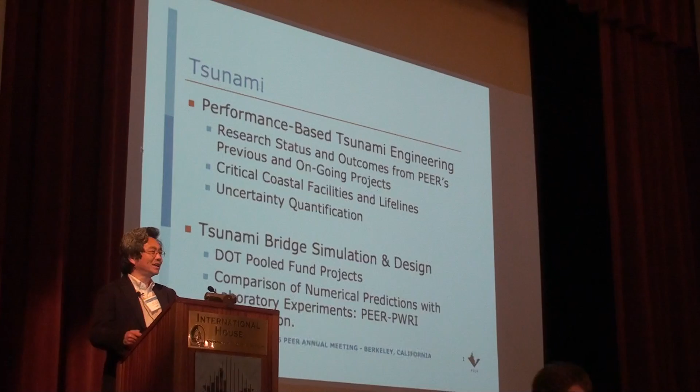Stand here. Okay. Where are you gonna sit? This afternoon consists of two major portions.

One of the topics is performance-based tsunami engineering, and the other is tsunami bridge simulation design. Those are the two major components.

About performance-based tsunami engineering, this is what we've been working on for the last couple of years, supported by PEER. Hopefully it's going to be an ongoing project. The emphasis is that we recognize we're trying to develop this methodology for critical coastal facilities and lifelines, and we are also heading toward developing a methodology for uncertainty quantification.

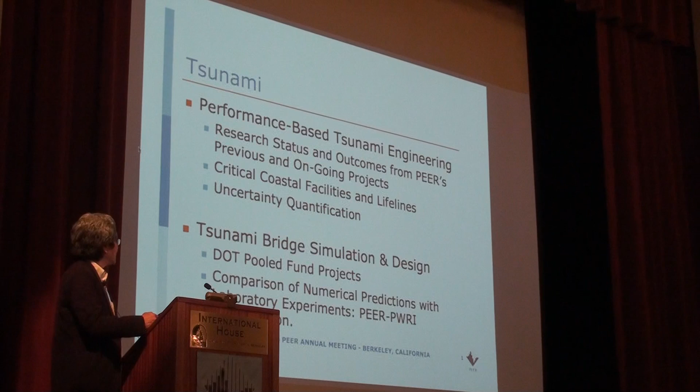For tsunami bridge simulation design, we have a DOT pooled fund project, and we are trying to develop numerical models and systematically compare them with laboratory experiments.

Let me talk about the PEER tsunami program. It started probably before this, but eventually it started actively right after the March 11, 2011 Tohoku tsunami. We had several meetings trying to find what is the optimum role for PEER in this.

What research can PEER contribute that would be most impactful to the California, Oregon, and Washington coast? That's why we discussed this during several meetings like this, and basically we tried to identify PEER's niche.

After these discussions, we thought it important to recognize that other people are doing tsunami research, like FEMA, which tried to develop hazard models for multiple hazards. They did not implement tsunami yet, but we did study such things.

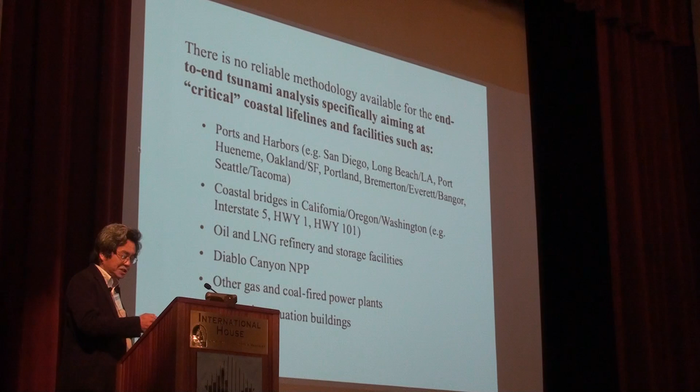Thinking about all these other activities, what PEER can do is pursue an end-to-end tsunami analysis, specifically aimed at critical coastal lifelines and facilities, so that we can extend performance-based earthquake engineering, which was developed by PEER. Those are examples of critical coastal facilities and lifelines—that's what we're looking for.

This is the performance-based earthquake engineering triple integral shown here—this is the fourth time, so I don't feel bad about it. Basically this is a systematic consideration; we're integrating the entire phenomena to make a physics-based assessment of the risk and damage.

But the tsunami case is a little bit different from earthquake engineering—actually, sometimes a lot different. For tsunami, you have generation from the earthquake, which creates deformation of the sea bottom, and this is very much uncertain. We really need to know the displacement of the sea bottom, rather than just the shaking intensity, so it's a very difficult thing to do.

The distribution of the displacement is also important, and then it creates a propagation. That part is pretty much handled. But once the wave reaches the continental shelf, we have some problems—it's very difficult to predict the run-up, shoaling, and reflections, and then creating an inundation.

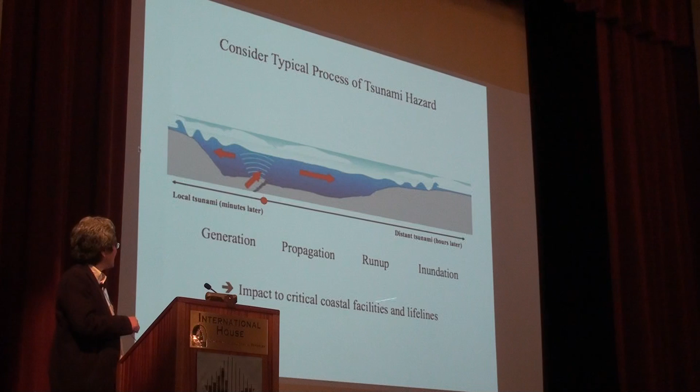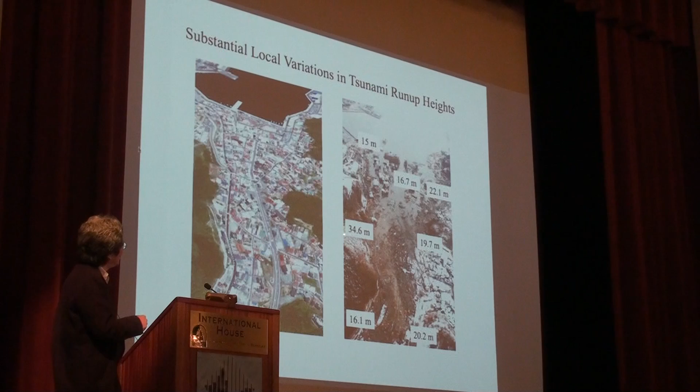If I take a look at the measured tsunami run-up height, one location got a very large number, and another got 15 meters—100% different. So clearly, for this, tsunami methodology has to be done with probably GIS-based approaches, because location is very important. Perhaps we should do a simulation-based, or scenario-based, analysis for this, if you think about these kinds of variabilities.

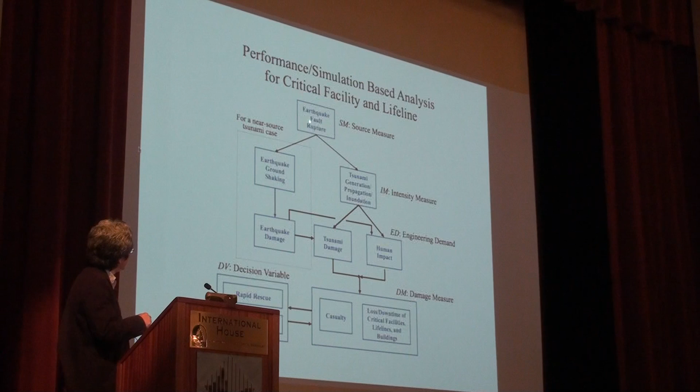So we talk about this—this is the sort of structure for performance-based tsunami engineering: fault rupture, propagation, damage, and assessment. So the tsunami version of performance-based engineering is just like this. We try to make it an integral formulation—rather than a triple integral, it could be a double integral, or it could be a triple or quadruple integral. But I think you understand the concept of these performance-based methodologies.

What we're going to talk about in part A is developing a performance-based tsunami engineering methodology. As a test bed, we use the port of Hueneme for this. So the things we're going to talk about next will be the following.

After me, Dr. Hong Kie Thio is going to talk about probabilistic tsunami estimation, followed by Professor Patrick Lynett, who will talk about simulations, and Dr. Keon is going to talk about the data explorer, and I will talk about evacuations. Okay, so next is number two, and then we're going to go with this.

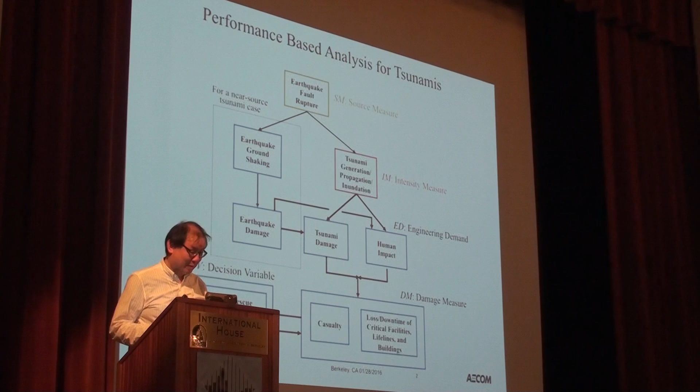So in Harry's scheme, we are looking primarily at these two boxes over here: the earthquake fault ruptures, and then the tsunami generation, propagation, and inundation.

With our background in seismology, the methodology we developed is very analogous to seismic hazard analysis, probabilistic seismic hazard analysis. I'm showing that here in these boxes: on the left, seismic hazard analysis, on the right, tsunami hazard. It's really the same concept.

We start off with the source models: magnitude, location, and recurrence. In the case of tsunamis, we also look at slip distribution. That's very important.

In seismic hazard analysis, we normally use GMPEs to characterize the ground motions based on magnitude, distance, and other parameters. More recently, people have started using systems like CyberShake to actually run simulations, and that's similar to what we are doing. We're using tsunami simulations instead of GMPEs, because it's more accurate and more practical.

In seismic hazard analysis, we then integrate to a site hazard using linear methods. We do the same for tsunami hazard analysis, where we integrate an offshore tsunami hazard, because in that regime everything is nice and linear, so we can efficiently integrate over a large number of scenarios.

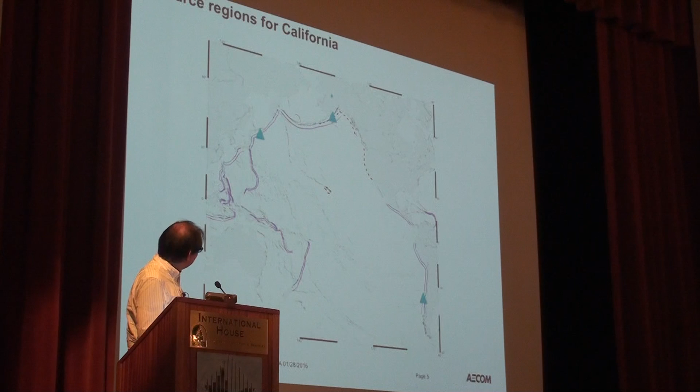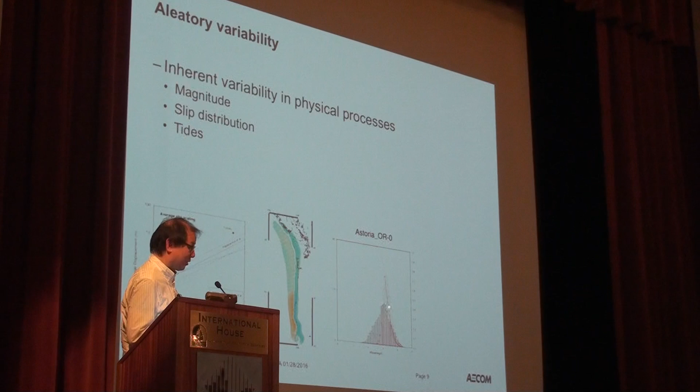And then finally, we also have to include modeling uncertainty. This is kind of similar to the sigma in GMPEs. And of course, since we don't use GMPEs, we don't actually have a sigma that is inherent to the process.

So we actually have to come up with our own version. PEER has actually funded us, for instance, to develop some equivalent sigmas for these probabilistic tsunami hazard analyses.

An example of them is shown here, where we're looking at a very well constrained earthquake. Of course, this is Tohoku. This is probably the best constrained earthquake that we have.

We look at the modeled results and the observations, and basically construct sort of artificial distribution functions and an artificial sigma for this analysis.

We do this for different circumstances, for different grid sizes, and also we differentiate between a local sigma and distant sigma, because the sigmas for the local environment in the near field are probably going to be quite different than for the far field.

Okay, so now looking at a couple of results and applications. This method, I think up to 2012, was funded by Caltrans through PEER, and since then the CGS has taken over the funding to actually produce maps for the state of California.

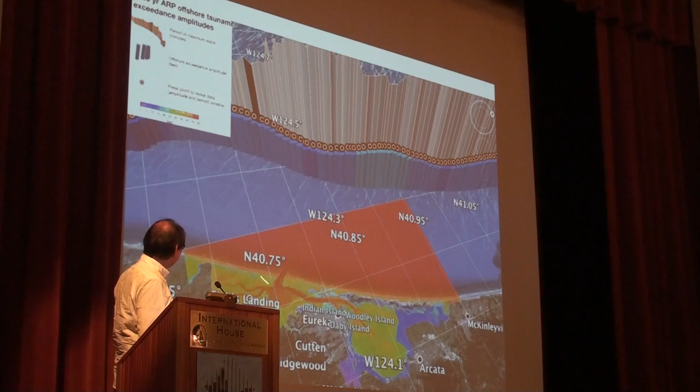This is my last slide. I just wanted to show that the work that we developed here at PEER has actually found its way already into other applications around the world.

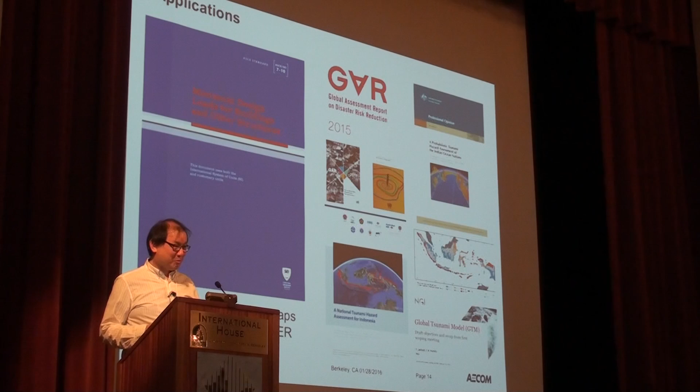So of course we have ASCE 7. It's also now used in the most recent issue of the Global Assessment Report, the tsunami part, uses the same methodology, actually the same software that we developed. Same thing for the tsunami hazard map for Indonesia, the Indian Ocean tsunami hazard map, and we've also started more recently a global tsunami model, which is hopefully going to be similar along the lines as the GEM, except that we don't have money. But it's in its early stages, and again, that will be using probabilistic tsunami hazard as a methodology. Thank you very much.

So what I'm going to talk about today is more on the modeling side, trying to understand modeled variability with a focus on currents.

One of the themes I'll touch on is that while modeling the elevations of the tsunami is relatively easy, and we have a lot of confidence in that, modeling the speeds falls on the other side of the spectrum. There's a lot of variability, both modeled and natural. It's a good research problem because we expect there to be physical variability. And when we talk about design of structures, we're most interested in the velocities. We talk about drag loads as proportional to the velocity squared. So we need reliable estimates of the velocity, or at least we need to know how unreliable they are. These are the types of things I'm going to talk about today.

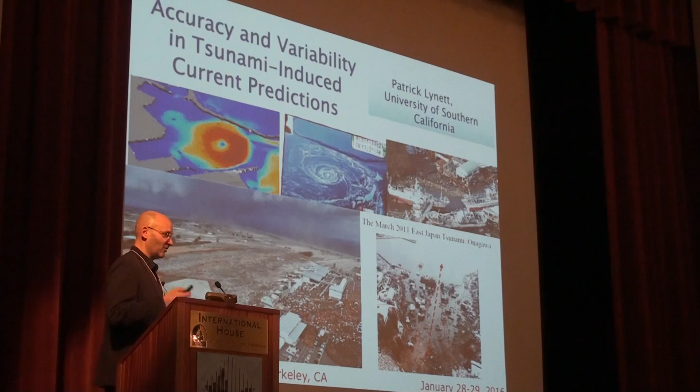Eddies are what cause us variability in the near shore. They are turbulent structures — fundamentally chaotic and nonlinear. We shouldn't be able to predict them in a deterministic sense, but yet they drive our currents in many situations. They're responsible for transport of large and small objects, and also for forces. We'll also spend some time at the end talking about overland flow, where you have to deal with interactions of structures, buildings, irregular topography, and things in the flow, and how we can get a handle on that in terms of variability.

So where we fall in this talk is in this box, the intensity measure. We're also doing work now on tsunami damage, trying to connect these speed predictions to damage, but I'm not going to talk too much about that here.

As an outline, we're going to examine model accuracy and inter-model variability. We've done a number of multi-model studies so we can get a handle on how these things vary. We'll focus on two main pieces: coastal flows, meaning areas where there's already water, and overland flows, which are areas that are dry. We'll discriminate between areas with eddies and without eddies, and talk about how spatial averaging and model ensembles may be a solution to the chaotic nature of the velocity. We'll talk about accuracy in flow depth versus speed, and look at some statistical measures of inter-model convergence to get an idea of how we can put confidence limits on some of this variability.

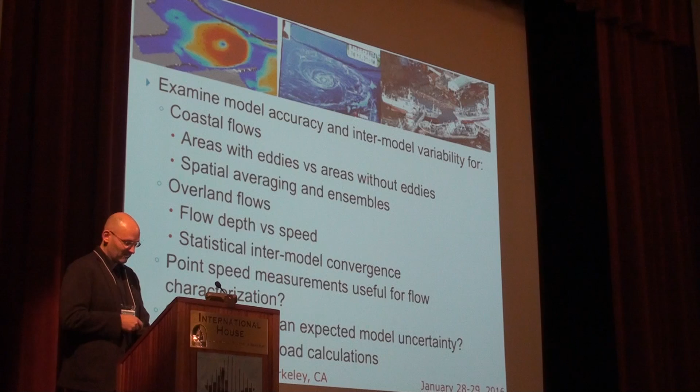I'll conclude by trying to resolve, or at least give you some thoughts on, two questions: are point speed measurements useful for flow characterization in light of the variability I'm going to talk about, and can we provide an expected model uncertainty if we use a single model in a deterministic type scenario? Obviously, there are implications for load calculations.

So I'm going to start with a community workshop we put together, where we brought in a bunch of different modelers from all the different states in the U.S., plus international participants, and gave them 5 different problems to run. I'm only going to talk about one here, which is Hilo Harbor — the Hilo Harbor breakwater on the Big Island in Hawaii. This is a uniquely instrumented harbor: you have a tide gauge and two ADCPs. An ADCP is a bottom-mounted instrument that uses acoustic signals looking up to measure the currents. So we have current measurements at these two locations along with the tide gauge, giving us a fairly well-constrained field case that includes velocities.

I'm not going to talk too much about how well the models did in terms of accuracy, just because I don't have time. There are challenges with these point measurements, but these devices in NOAA networks don't sample that frequently. They're not made to sample tsunamis, they're made to sample tidal currents, so they often only sample at 6-minute intervals. In a tsunami, the current varies over the course of minutes, so you have a lot of problems with undersampling on these instruments.

So I'm going to talk about inter-model variability instead. What you see here in this elevation view, as it's running, is the water surface elevation. The reds are high, the blues are low. The point to notice is that on the scale of the harbor, there's not a whole lot of variability in the water surface elevation. The area kind of sloshes around like a bathtub, but it all changes together.

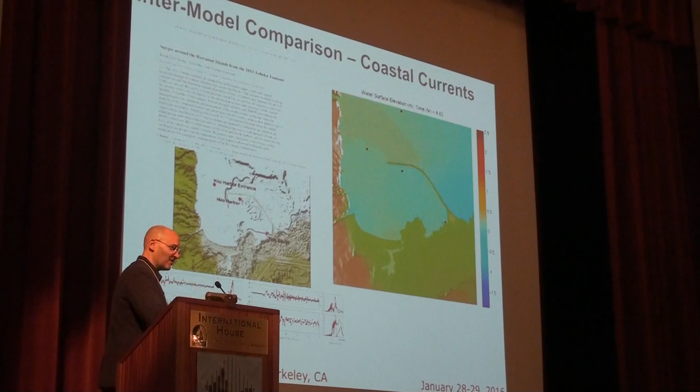That is going to be very different from the current prediction. Now this is showing you the speed, where the deepest reds are the strongest currents. What you find here is a lot more spatial variability - things change much more quickly over small periods. You also see these donut type things - these are our eddies, these coherent turbulent structures that get shed off. They have a mind of their own, they float around, but they contain very strong velocities.

So they're essentially carrying the hazard with them as they go, and their paths are strongly random. Small perturbations to the bathymetry, to the flow, make them have different paths. They're fundamentally stochastic, they're random processes.

What you see here is that as the flow turns around with the breakwater, you have strong currents as it gets pushed through - a lot of water getting pushed through. There's a relatively shallow area here, so you see the strongest velocities. Also, make a note of our two ADCPs right here, here, and here.

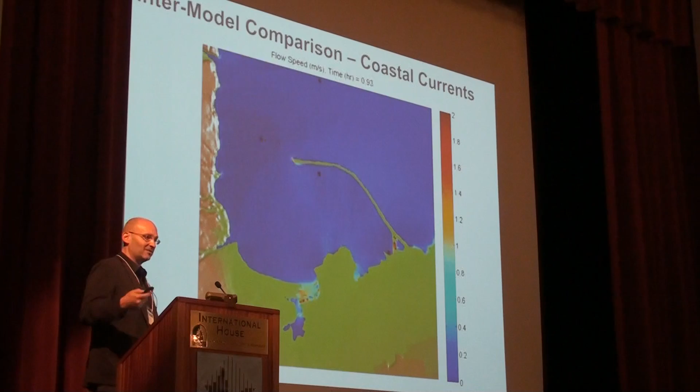The thing I want to reiterate here is that you're using a point measurement either to calibrate a model or even in real time to figure out the hazard that exists during a tsunami. If an eddy passes through one of these, you get a very different signal. So what is the chance that an eddy passes through here? It's one of these issues that we have with point measurements.

In fact, when we went through this benchmark workshop, we found some really interesting things on the modeling side when we talk about point measurement. Interesting things like the 20-meter resolution and the 5-meter resolution results gave the same numbers, but the 10-meter resolution gave very different numbers. It's really, really hard to reconcile model convergence where your high and low resolutions agree, but the one in the middle is bad.

So the reason for some of these is shown here. You have a snapshot of what we call vertical vorticity - how much the water is spinning around the vertical axis. It's the whirlpool, right? If you look at the flow, you see the water spinning around. These colors give you an idea of how quickly they're spinning. In a 10-meter resolution and a 5-meter resolution at the exact same time, you just happen to have an eddy at the measurement point in the 10, and you don't have an eddy in the 5. So you wind up with very different peak velocities, very different signals because of this random feature.

All right, so now let's get to the inter-model. Again, we had 14 models, a lot of models. Everyone contributed to this. There were models with sophisticated numerical schemes, simple numerical schemes. There were models with simple equations to solve, models with three-dimensional equations to solve, so we had a nice wide range. You can take all of these models - they're all running with the same bathymetry, the same friction coefficient, the same controlled boundary conditions. So the variability that you get is driven by the modeling itself.

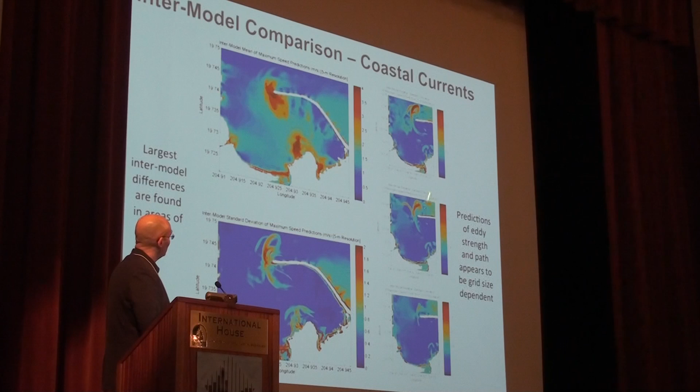How do we reconcile it? The other thing you notice is that these are model standard deviations as a function of resolution, from the coarsest to the finest. So the strengths of these eddies are going to be dependent on the model resolution. It's another tricky thing to deal with.

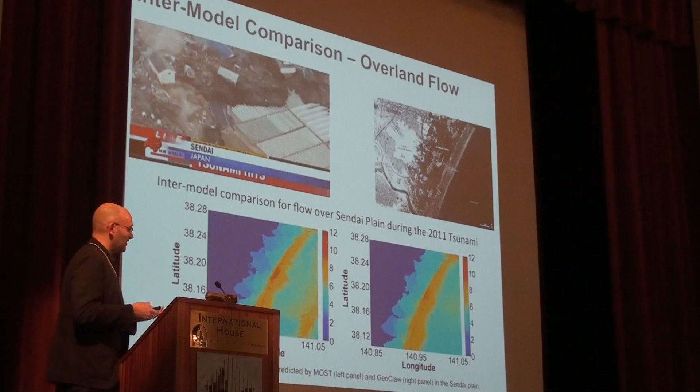Let's talk about overland flow here. We're going to focus on Sendai. Sendai is unique—it's a long, flat plain with very strong flows. You had inland inundation on the order of 5 kilometers, so the flow went really far inland. You're talking about flooding numerical models across many, many grid cells, which should be a tough thing for an intermodel comparison to pick up.

But what you find here with the two models we tested is that they do very well. They agree quite well on where they pick up the inundation limit, as you can see here. The two lines are the two different models we tested, showing how far inland the water went, and the dots are the measured run-up points. So these two models, in terms of catching this 5-kilometer inland run-up, do a good job. This is promising—we have two models with controlled bathymetry and boundary conditions, but they're reproducing the flow elevations quite well.

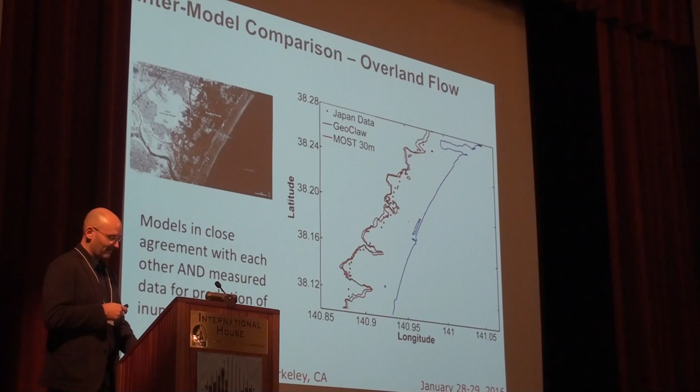But let's now talk about velocity. We look at the same plots showing maximum velocities from the two different models, and we start to see a different picture. I'm not going to show statistics here, but if you look at variability locally at a point, you start to see 5 to 80% variability in confidence limits on speed. This is tricky because our structures exist at a point, so you have to handle this variability in terms of model prediction.

The other thing I'll mention is that we have very, very limited data in terms of velocities and overland flow. I can't emphasize that enough—there's very little out there. So I can tell you there's a lot of inter-model variability, but I can't tell you anything about the bias because I don't know if the models are accurate. This is the limited data we have—those triangles are data points, and the squares are model results. They do well sometimes, not so well other times. The error here is within the model variance. That's about as much as we can say.

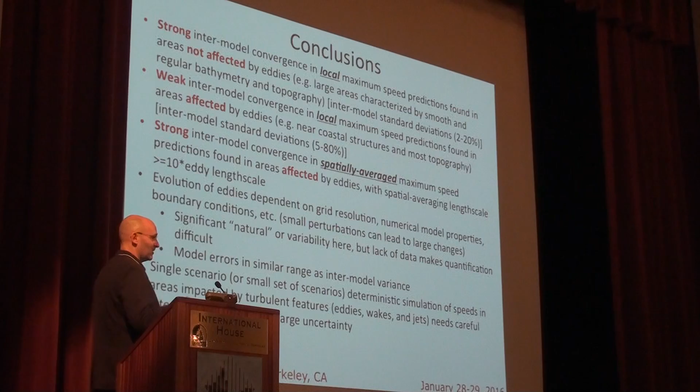I'll skip to the end here. The conclusions, where we are right now: we have strong inter-model convergence on local max speed when you have areas with no eddies. If you're in a simple spot, you're good—talking about model variance between 2 and 20%. No eddies, easy, good, you're set.

As soon as you get into areas where you do have eddies, you now have very weak inter-model convergence on local predictions, talking about 5 to 80% in terms of variance confidence limits, 5 to 95%. You can do things like spatially average, and that gets rid of this because you're averaging over the eddies, but you have to average over a distance about 10 times the eddy length. If you do that, you can start to come up with statistically meaningful and convergent results.

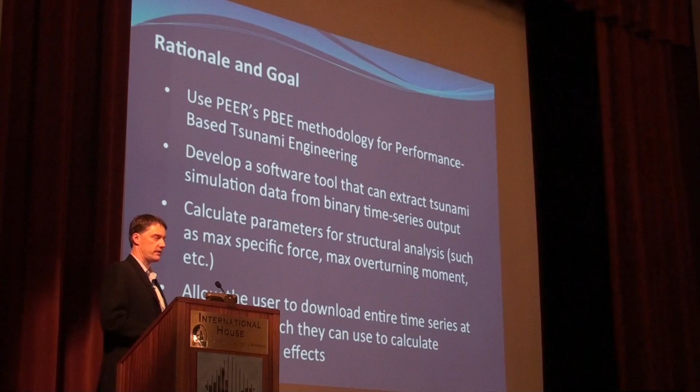So we wanted to develop a tool that would allow the user to quickly extract tsunami simulation data from binary time series output. The tool allows you to calculate the parameters for structural analysis, as I'll show you, and then to download the entire time series at any point, which they can then use to calculate hydrodynamic effects, which is what Harry will demonstrate a little bit later.

But we wanted to take the tool beyond that. That was really a proof of concept. And with funding from PEER, we were able to do that. In the process, we had some considerations of what we wanted in the system.

We were working with pretty large spatial temporal data sets, as many folks are. But processing speed is very important. We wanted to do this in a web-based fashion, so we needed very fast, real-time access to data. And visualization and interactivity was important. The spatial context is not just helpful, it's really essential in this case. And we wanted to give the user a spatial context where they could click and interact with the data, and also do some dynamic graphing and charting and other representations.

So as I said, we wanted to do a web-based interface. Like building web-based tools, everyone has a web browser, and it's very easy to go in and just access the data in that way. You don't need special software. Because the data is spatial temporal in nature, the GIS-based platform made a lot of sense. And the one requirement that we wanted was the ability to integrate additional tsunami simulation output data without much effort.

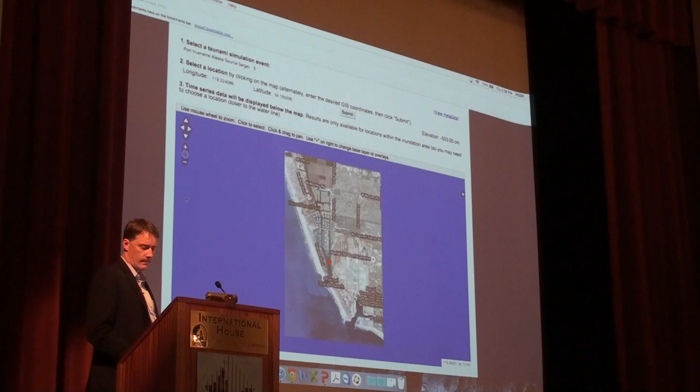So you choose a source event, and you can punch in coordinates directly if you know what they are, or you can just go click on the map. Let me zoom this out to what you see when you first arrive here. The map is constrained to the spatial domain of the simulation that was run. So you can zoom in, find a place of interest on the map, and click a point.

Click any point on the map, and it's a little hard to see on the screen, I think, but this chart, which is inundation depth, is being updated on the fly. What you're essentially seeing on the map here is a representation of a space-time data cube. We have 3,600 time steps in here, so for any point that you click on the map, you're pulling out a time series of 3,600 points. That's what's being charted along here.

And if I collapse this down, it's like these are all expanded, but there are actually six charts down here, and you notice that each one of them displays a max value. So anytime you click on the map, that max value gets updated, and all of the charts get updated. We're showing multiple different parameters here, all being calculated on the fly.

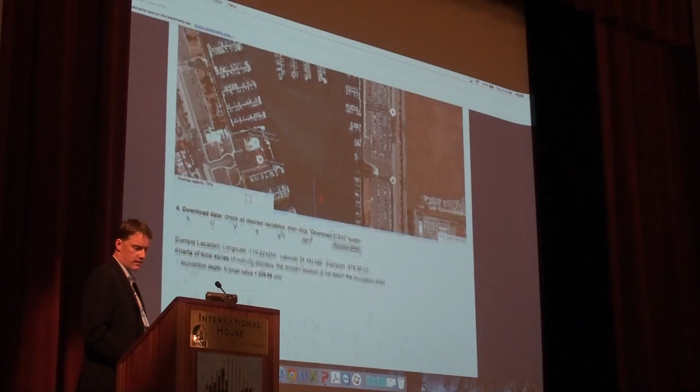The map itself allows you to load in other data layers, any of the Google-based layers, but also we have the bathymetry layer on here as well. And there's a bathy topo layer behind the scenes that's grabbing the elevation for every map click. And we also have the max flood surface elevation, which can be plotted as a grid.

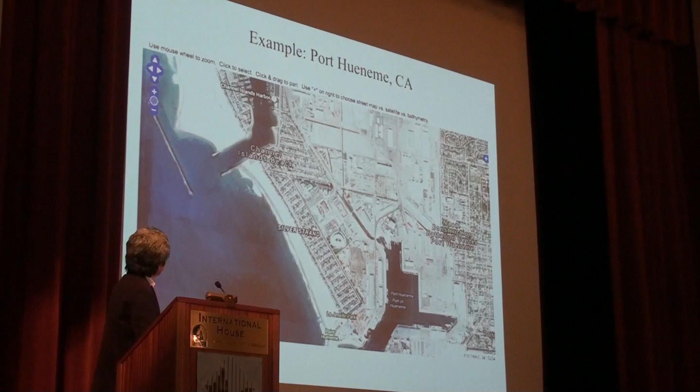Let me show you some kind of application for this tool. How do I do it? What was it trying here?

This is GIS based, and I think this is important to do because tsunami effect is quite a bit different from place to place. But the real eye-opening example was what Pat showed us about the jet formation. So we really need to know where it is.

My example is I just take a look at this simple, rectangular shaped building. And then I pick up the 1, 2, 3, 4, 5, 6, 7, 8, 9 points, each points about 5 meters apart. And then quickly take the data out and calculate the velocity and inundation forces.

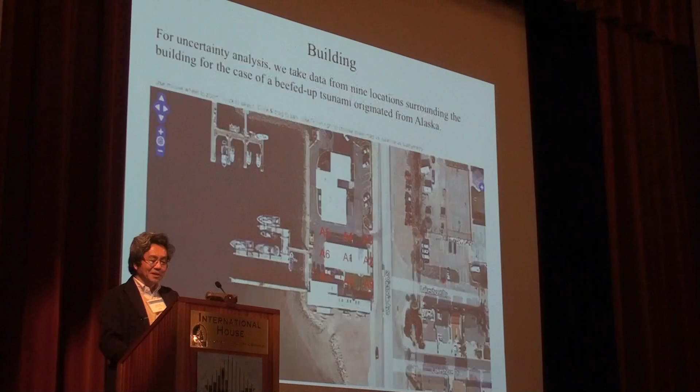So that's the sort of list I can get immediately on that. And then I can also put up, this is the inundation, such a close area, and the variability is remarkable. But at the same time, the good part of this is I can at least - right or wrong is a different story - but at least I can quantify the errors.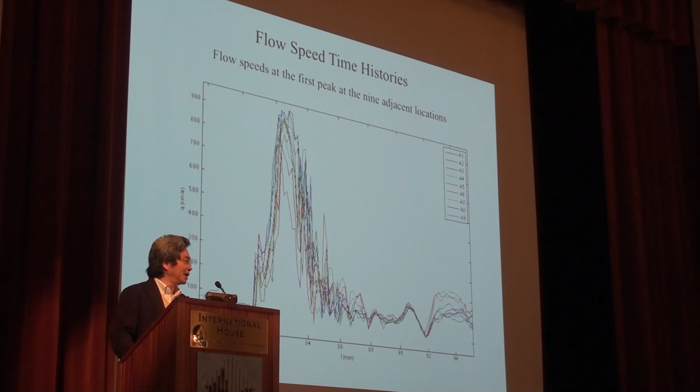Okay, this is for the flow speeds. And then if you know flow speed and the inundation depth in time series, then I can calculate the forces. This is the linear momentum flux forces, assuming this flow to be steady state. And then after this, I can get some error estimate for this, a 90% confidence interval for this. This is just one example.

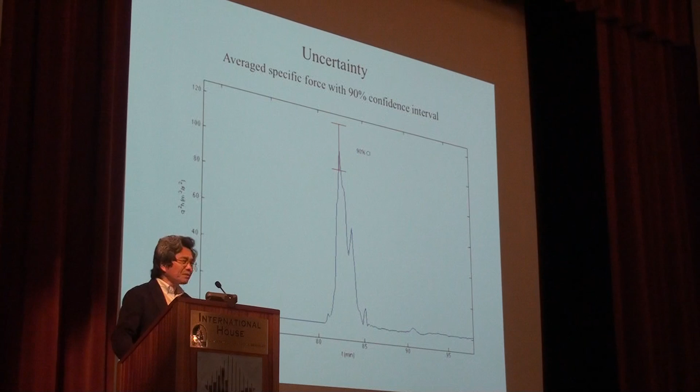And the one reason why we need to do those time series data is the following. When we try to make an analysis for tsunamis for critical facilities and lifelines, we just need to be very careful. Like for the Japan case, some of the concrete buildings toppled. One of the major mechanisms for that is the buoyancy force. The buoyancy force reacts with a time lag. It does not respond with the rising water. So we need to know the time series of the inundation depth.

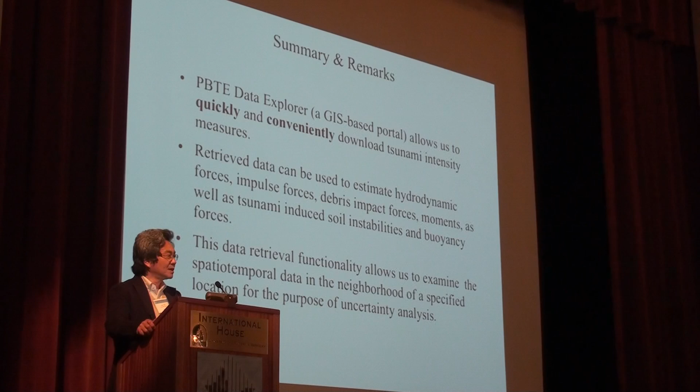And another thing we need to know for the time series data is, of course, trying to find soil liquefaction. Momentary soil liquefaction is caused, I think, by eroding from the soil surface by the inundation up and down. You have to know those time series data because soil response is based upon the diffusion equations.

So if you really try to find those kinds of things for critical structures, we have to have time series data. Okay, so for the summary and remark here, as you see, the response is so quick - there's a huge amount of database in here.

And then you can retrieve the data very quickly and in a very convenient way. This portal is also very user-friendly. So that's the advantage of this.

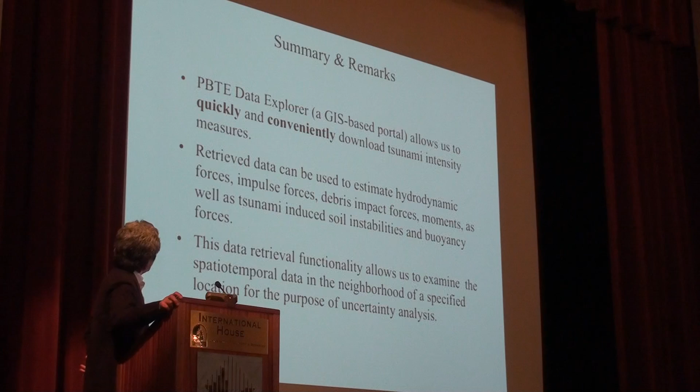Once you get that kind of data, we can get the hydrodynamic force. That allows us to examine spatiotemporal data analysis. That's the thing we can do. And at the same time, we can quantify those uncertainties.

So very fast is one word. Another thing is this really gives you a very nice probabilistic analysis. Right now the data we have for this portal is only 5 or 6 cases. We'd like to expand to 25 or more cases for this tool, and then use this platform to do exercises to find the quantification of the uncertainties.

As you can see, if you have this kind of IT tool, you can combine or attract people from different disciplines working together on this portal. And at the same time, you can actually quantify the model data.

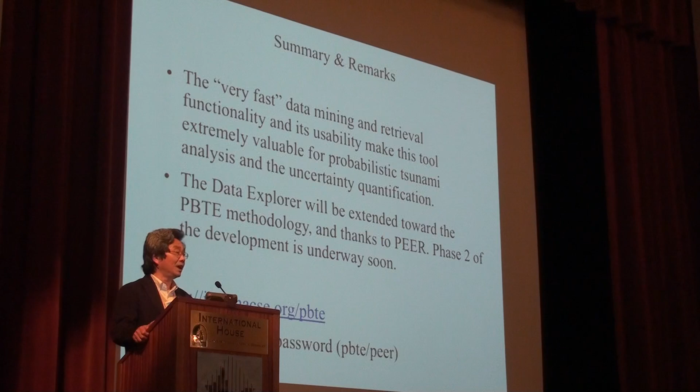Let's see, this is my last slide. All right, this is my last, okay, that's my last slide. And then I can very quickly talk about the casualty, and after that I think I have to give it to the next speaker.

I have been working on tsunami hazard and casualty estimates, because casualty is a very important thing for tsunamis. Tsunami is a very rare event, but you know that the hazard kills people. So this is sort of the effects of this.

This is performance-based tsunami engineering. Whenever you try to make a casualty estimate, people talk about the agent-based model, and that's fine, it's a very nice exercise to do. I tried this agent-based model about 10 years ago. This involves significant uncertainties in human behavior. Human behavior is totally a question mark, very difficult to predict.

So whenever you do the agent-based modeling, you can get the results, but we have to know it creates a significant amount of uncertainties. I'll show you why I'm saying this.

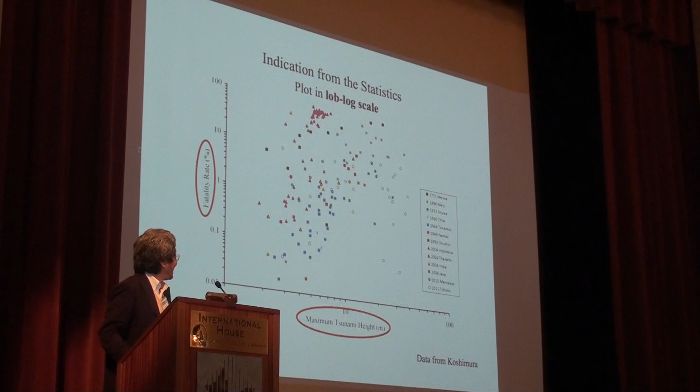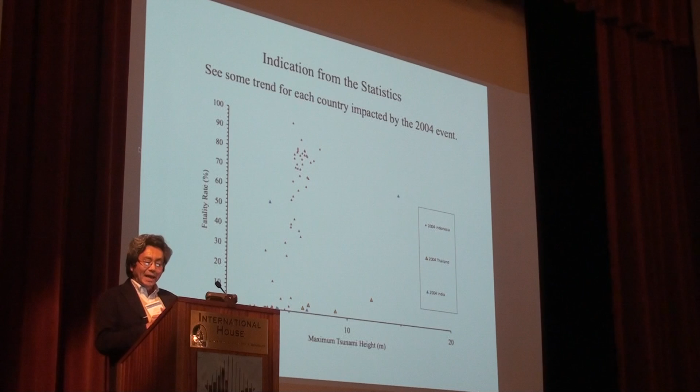This is the statistical data for maximum tsunami height versus fatality rate. This is a log plot, this is a linear plot. I extracted several cases. This is for the 2004 Indonesia case, the 2004 Thailand and 2004 India cases. They show some trend of increase, some correlation.

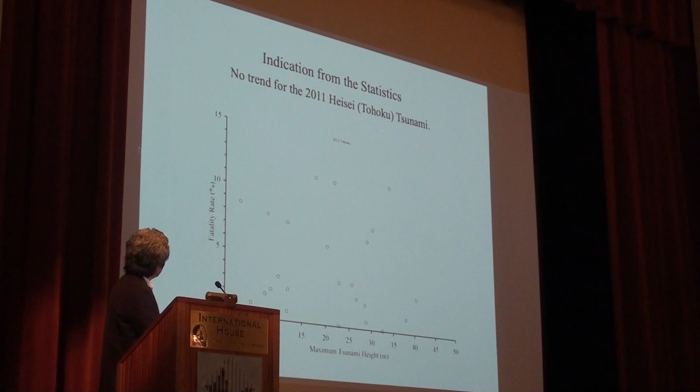And this is for the 1993 Okushiri case and other cases, showing some kind of trend. However, if you take a look at the Japanese case, there's no trend at all. So the only trend we can get from this statistical data is that the tsunami fatality rate diminishes when maximum tsunami height is less than 1.5 meters, nothing else.

Unless you're talking about one given event for a given location. So the conclusion for this analysis is we have a very weak trend for the fatality rate. Fatality rate increases with tsunami height for given events and given localities. So once you have that data, you cannot translate it to predict other locations or other events. More likely, people's prior knowledge is more important, education is more important. So how society reacts is more important than the tsunami's actual physical forces.

So that's the thing. An important factor for tsunami casualty estimation is time. Time-related factors are essential for estimating tsunami casualties. I don't have so much time, so I'll just talk about what's next, and then we can discuss this tomorrow. We have a discussion session tomorrow.

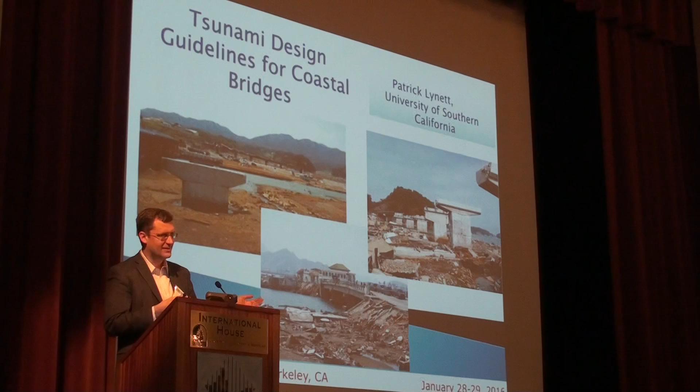Thank you, Harry. So I'm leading part B of this session. Part A was focusing on the source-to-site propagation, kind of what height and velocity of flow at a point, a point being a structure. In part B, what kind of tools and analyses can we do with that information for critical structures such as bridges, which Pat will talk about. Then I'll talk about some other simulation tools we use with bridges, and Mike Motley will talk about advanced modeling of tsunami effects on bridges. This gets back to the end-to-end simulation. We started with the source, now we're getting to the site and what Pat's been doing, some recent and current efforts around bridge analysis for tsunami loading.

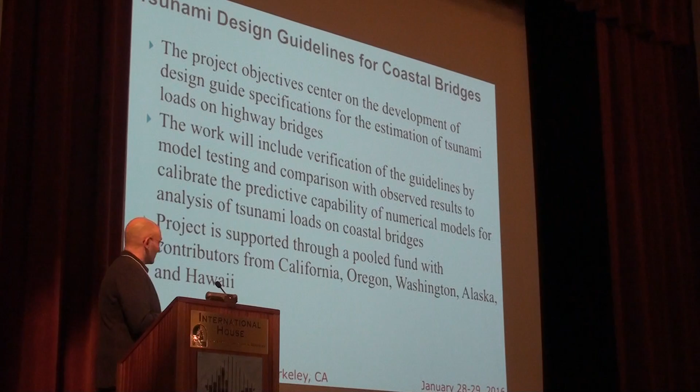So the representation is really specific. We have 5 major working groups. Working groups 1, 2, and 5 are the main ones, but we have 5 major points, and these also kind of lead in time to where the work will go.

So the first working group is tsunami hazard and mapping, coming up with the hazard indices responsible to drive the loading calculation. This group is led by Hong Kie and myself—I'll say mostly Hong Kie, but with a wide group of people.

The idea for this project was to have a few centralized people running each working group to do most of the work, and then bring in larger groups from the community to run workshops and have community discussions, to make sure we had a wider range of inputs so we weren't doing things in a bubble.

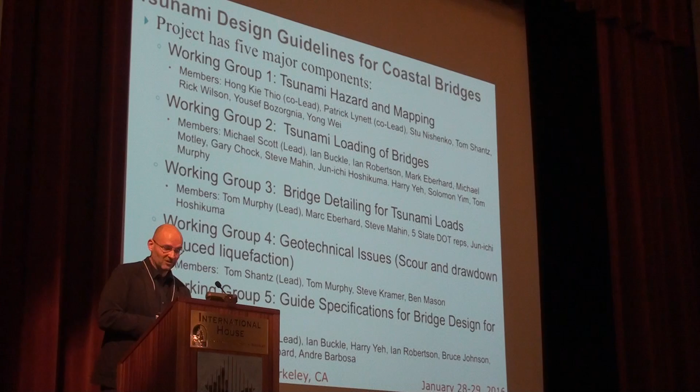The second working group is to come up with the meat of tsunami loading of bridges, led by Michael Scott, again with a range of people to add input. We include groups on bridge detailing and geotechnical issues. Those are relatively minor in terms of the entire scope—minor only because we were judging where to put our resources in terms of funding and what to focus on.

The last working group, working group 5, is led by Tom Murphy, and this is the code—the actual writing, the discussion of the prescriptive method. So here I'm just going to focus on those 3 groups to tell you what we plan on doing, what our deliverables will be, what you can expect to see in the coming years.

So working group 1 has 3 major components. First is the development of a tsunami hazard map database appropriate for the design of bridges. Right now we're looking at what all the states are doing, and they tend to do things differently and not necessarily consistently, so we have to find some way to bring all of these together.

The specification of the hazard level here for bridges is going to be at the 1,000-year level, consistent with other hazards looked at for bridges. It has a disadvantage in that you can't directly use some of the ASCE 7 maps because there are different hazard levels, but you can use similar approaches.

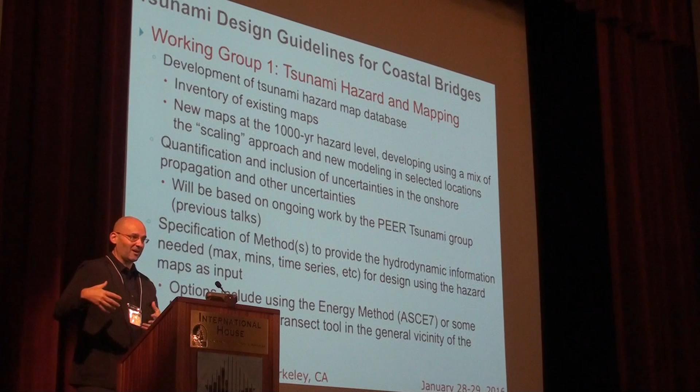We'll include quantification of uncertainties in a way appropriate for bridges, leaning on work discussed in Part A. The last component is specification of site-specific hydrodynamic information. There are lots of ways to do it - you can run numerical models or simpler things. Right now in ASCE 7 there's the energy grade line method, which sits somewhere between a robust numerical model and a prescriptive method. It tries to include some physics in a very approximate way. We'll look at other options too, including transect-based models or other ways to include variability from this modeling tool.

The second working group, again led by Michael Scott, will talk more about this and some work leading into it later. The first major task is the literature review, which is where we are right now, and identifying knowledge gaps - what do we need to fill in to bring all this together and come up with loading approaches and loading calculations for bridges? Workshops are involved here, with lots of discussion. This will lead to a testing phase, where we have knowledge gaps and need to find ways to fill them.

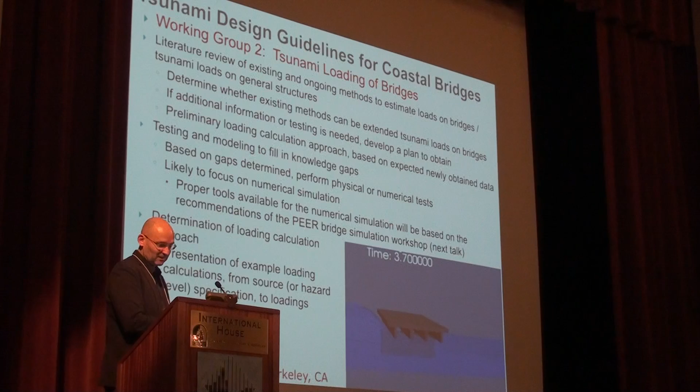This testing phase is likely to focus on numerical simulation only, because the budget allows a lot more numerical simulation than physical model testing. The tools we'll use in this phase will really leverage some of the work that has happened at the bridge simulation workshop.

After all this, the loading calculation approach leads to the last working group, Group 5, again led by Tom Murphy, which has two phases - a draft with lots of discussion, and a final version. This whole project is three years in duration, and the final guide spec is expected to be done sometime in June 2018. So it's forward-looking - we're looking down the road, and we'll get there.

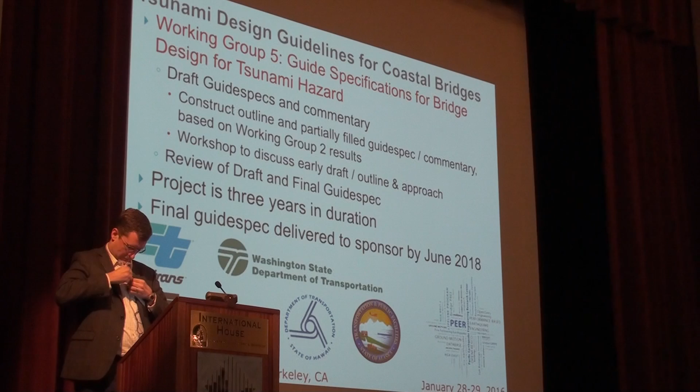Pat discussed a current project that PEER's involved with around bridge forces and determining loads on bridges. I wanted to talk about a recent effort that PEER supported on a workshop held in December of 2014 at Oregon State University around simulation. That'll be the subject of this talk, and then Mike Motley will talk about some more advanced simulation details.

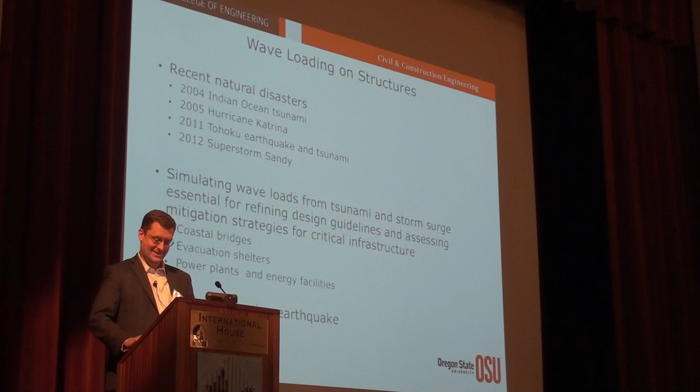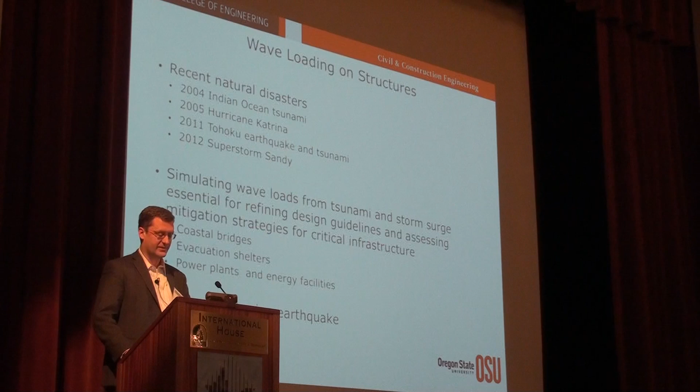As has already been established, wave loading on structures is important. Given recent natural disasters, it's become a very important topic of study, and determining if our critical structures are resistant or can resist such forces observed in these recent disasters. Simulation of bridges, evacuation shelters, power plants, and other critical facilities is essential in order to develop a performance-based tsunami engineering framework, which is one of PEER's thrusts. Also considering the case of tsunamis following earthquakes, simulation will be a big part of that effort.

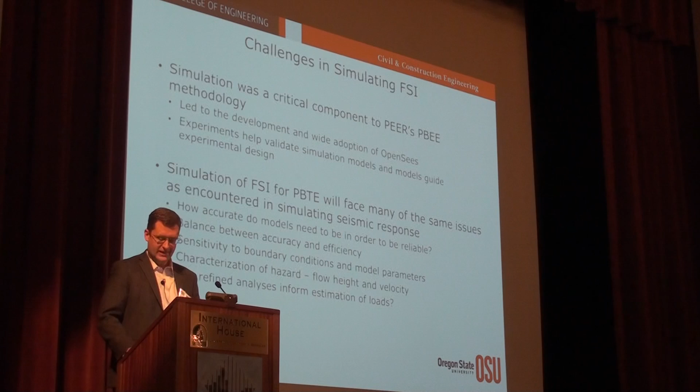Just like with earthquake engineering and modeling the response of structures to seismic forces, a lot of the same questions come up when modeling the response of structures to hydrodynamic or tsunami type loads. How accurate do models need to be? What's the right balance between accuracy and efficiency? Can we get away with 2D models, or do we give up too much accuracy for that efficiency, and have to go for 3D models with other tweaks within them? It's not necessarily the same answers between earthquake and tsunami simulations, but just like with seismic simulations, boundary conditions and model parameters play a big role in the response, as does characterizing the hazard accurately.

Flow height and velocity are really the two things that characterize the hazard in terms of figuring out the loads applied to structures in a tsunami. And of course, can refined analyses inform the estimation of loads in order to determine design specs, like Pat just talked about.

So to this end, back in December 2014, PEER funded or supported a tsunami bridge modeling workshop. There were about 33 participants from the US and Japan, about a quarter from Japan. A lot of the faces you see here are probably in the same room or were at some point throughout today.

We brought everyone together to compare simulation methods and discuss differences in results, identify knowledge gaps, and see where we need to go in order to drive PEER's efforts around performance-based tsunami engineering. So these are the participants.

There's a web page where all the workshop materials are made available, and essentially it was a blind prediction, or quasi-blind prediction contest, of experiments conducted at PWRI in Japan, I believe in 2012 or late 2011, after the Tohoku event.

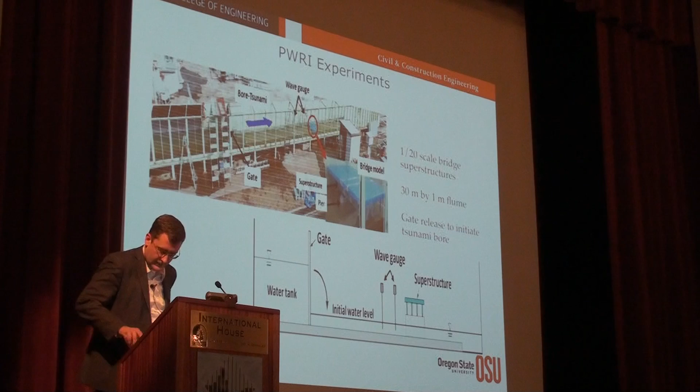What we see here is a 30-meter long wave flume. There's a reservoir of water held back by a gate, and you can see the water level is pretty high here, a standing water level. Down here is a 1-to-20 scale bridge deck model stuck in the flume, some 10 meters down from the gate. The total distance here is 30 meters.

So this gate is released, and then a tsunami bore ensues and impacts the bridge superstructure. This is well instrumented - pressures are taken all over the deck at different points. From those pressures, you can determine forces and look at the superstructure response to the tsunami attack.

So again, the gate's released, and then the tsunami just goes down the flume.

There were a lot of different experiments run by PWRI, but only 4 of them were chosen for the workshop, with 3 different deck types. There was type A, a slab bridge configuration restrained at 2 points, and a 4-girder deck bridge restrained down here where the bent caps would be. Then the same deck type C with a protective bumper on the side of tsunami attack, designed to dissipate the tsunami flow and hopefully reduce the forces. So 3 decks, 4 different cases.

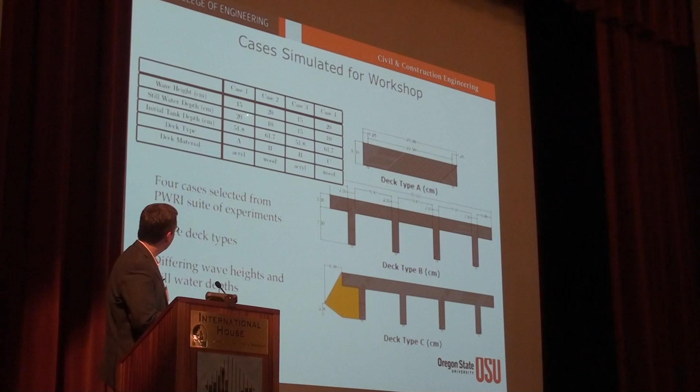It's probably a little hard to see here, but there were differences in the computed wave height based on calculations of what the wave height would be at the point of contact, as well as differences in the still water depth. The water level was varied, as was the level in the tank, and based on relationships between those two and the flow, you could predict what the wave height would be. The wave height and velocity was measured by wave gauges about 1 meter in front of the deck.

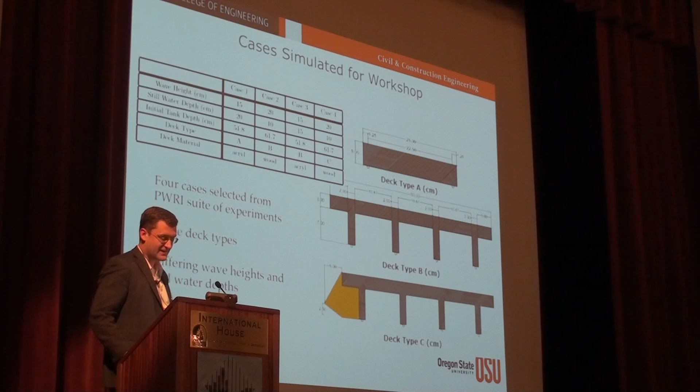So differing wave heights, differing still water depths, 3 deck types, 4 cases. There were about 8 or 9 different software packages used, employing a wide variety of formulations. I don't expect you could read all this table, but the key things were that there were volume of fluid approaches as well as finite element approaches.

One of the finite element approaches was based on OpenSees using the particle finite element method. A volume of fluid approach was based on OpenFOAM, which Mike Motley will talk about here in a few minutes. And there were various others - LS-DYNA, the MPM method by Pedro Arduino at University of Washington, among other methods.

So there were 2D and 3D models, single and two-phase models. A single phase model is just the fluid; two-phase is where you model fluid and air, because air pockets end up being a pretty big deal when they get trapped under the decks, as Mike will talk about here in a minute. As well as turbulence models, how you represent the high velocity, highly chaotic flow around the structure at the time of impact.

Right? Okay, so this doesn't show up very well, does it?

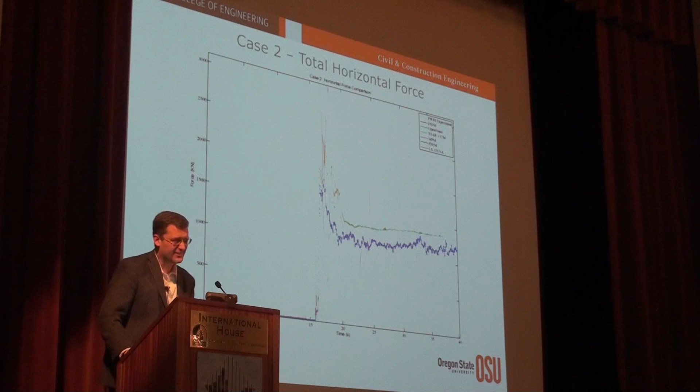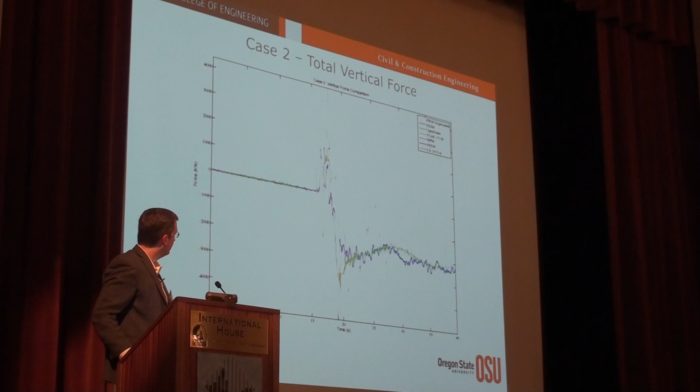Not unlike earthquake engineering simulation. I helped write OpenSees. I know there's a lot of variability in models. Okay. No chuckles?

Okay, so last slide here. The key observations from the workshop, the takeaways, were that it is worth doing 3D models when you want to look at the hydrodynamic forces on structures. The 2D models we found in the workshop just didn't do very well, and that was due to localized air pockets and vortex shedding not being accurately captured by the 2D models. The 3D models also help you look at the effects of skewed bridges and other sloping and things you just can't model in 2D.

Turbulence models tended to improve the results compared to the experiments, and of course the initial and boundary conditions were all important, especially with respect to how that gate opened for the water tank. There's additional details on the workshop webpage and the final report, which is forthcoming.

And at this time, Mike Motley's going to come up and talk about some of the more detailed modeling within OpenFOAM around modeling tsunami forces on coastal structures. And then we should have time for questions for parts A and B at the end of this talk.

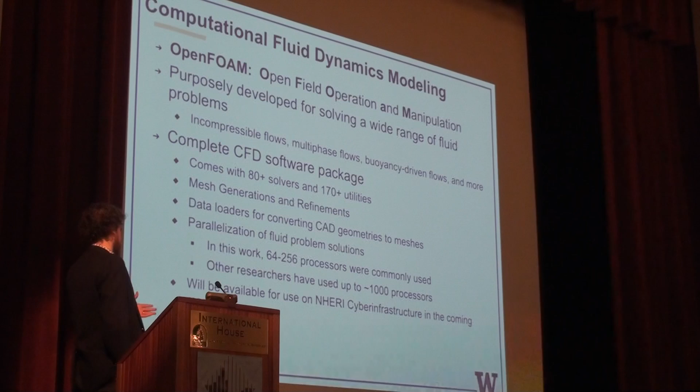With open source code, we're able to not worry about licensing issues when we have to deal with really ramping up the parallelization. And this will be available on the new NHERI Cyberinfrastructure in the coming months. I know Pedro Arduino is going to be talking some about that tomorrow, but we were at the workshop a couple of weeks ago, and they're happy to get that on there and let people use their supercomputing capabilities to start practicing with this.

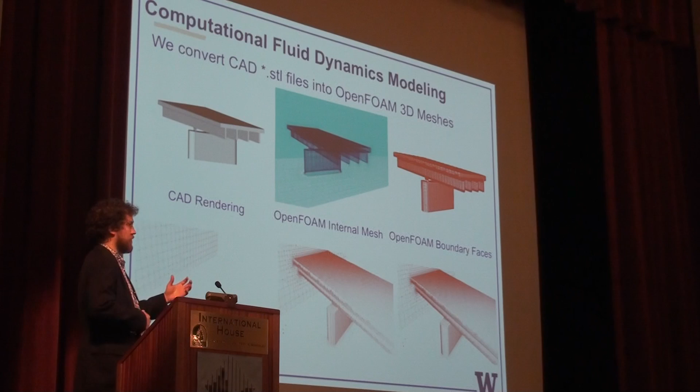So, just quickly, in terms of meshing, building your model, we've got capabilities. We can build a bridge. Here we've included the whole 3D bridge with the substructure as well. We import it into OpenFOAM, and then we mesh around that. We end up with a kind of an empty block that we insert the bridge into. It does its best to snap squares around the bridge, and then refines all those edges so that we get a nice curved shape.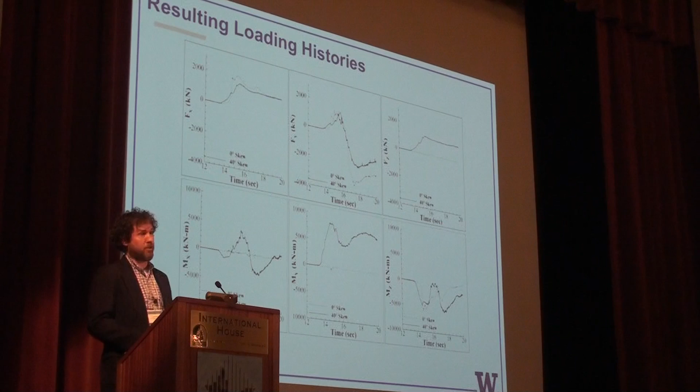If we think about what happens if we skew the bridge, we have to ask ourselves, if you're going to do a 2D model, where is the slice? With a skewed bridge, if you slice it in any specific spot, its distance to the water surface is going to be higher or lower. So what we find is we do start to see changes in the uplift force, in the horizontal forces, and introduction of spinning moments based on when the water is hitting just one side of the deck. These are the kinds of things that we would miss in a 2D model. We can try to start extrapolating it in, but the 3D models are able to capture that a little bit better.

Another thing that was brought up was fluid-air structure interaction. We said that we had those peaks which may be occurring in the 2D model and not in the 3D model, and maybe because of air. So we started modeling this bridge. It's a bridge in Washington. It's not in a tsunami zone, but we at least wanted to start modeling a bridge that looked more like a bridge and less like an experiment.

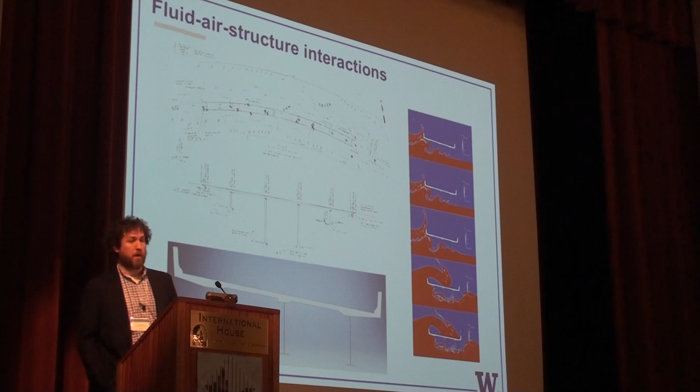So if we model this, this is the total horizontal force on the bridge. When I say total force, I mean the sum of all the pressures on the entire, every face of that bridge we showed right here, a steel girder bridge, and we see these total horizontal forces.

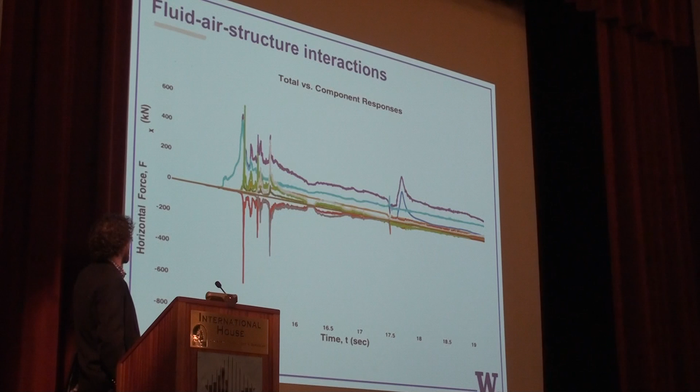Now what happens if we break this up into the components? This is each individual face from the cross section, and we're doing 2D here. What we see is these equal and opposite curves that start to propagate across. They're not necessarily contributing to the total force, but they're showing up as big peaks.

So we were curious as to what was happening. What we find is that the red curve here and the green curve correspond to the back face of the front girder and the front face of girder 2. Equal and opposite, it's on these two faces.

So we can assume this is air. We see that this continues to follow along, corresponds to all of our peaks, all the way through. We see these little pulses of air getting trapped underneath the structure. In the horizontal load predictions, it doesn't end up causing that much of a problem because they become equal and opposite. They don't really contribute to the total load.

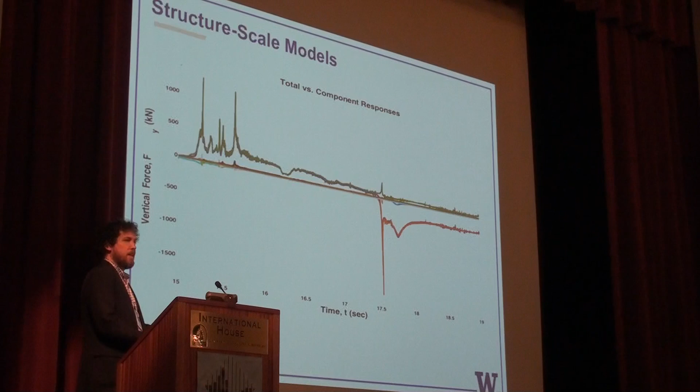But for the vertical, there's no equal and opposite, so we end up with these peaks. We're looking at that and trying to say, okay, the water's going up under, we're getting these big uplift peaks. But when we start matching these peaks with the air pressure peaks we're assuming from the horizontal load, we're finding these peaks all coincide with air pulses. So we're not seeing the water come in underneath the bridge to cause big loads — we're seeing these air peaks.

If you go through and calculate your surface area, the math matches up with these peaks. So with the 2D model, maybe we're seeing air entrapment that will be there physically, or maybe we wouldn't. We're running 3D models right now to see if we can eliminate these peaks by putting gaps in on the edge, to see whether this is real or numerical. I think the answer will be somewhere in between.

Lastly, here's a bridge that we've been modeling. This is an OpenSees model, or an OpenSees schematic, of the bridge we showed a few slides before. What we're trying to do is say, what happens if we build a structure, run OpenSees, subject it to an earthquake, and then subject it to a tsunami? Because ultimately, that's what we're all trying to do, right?

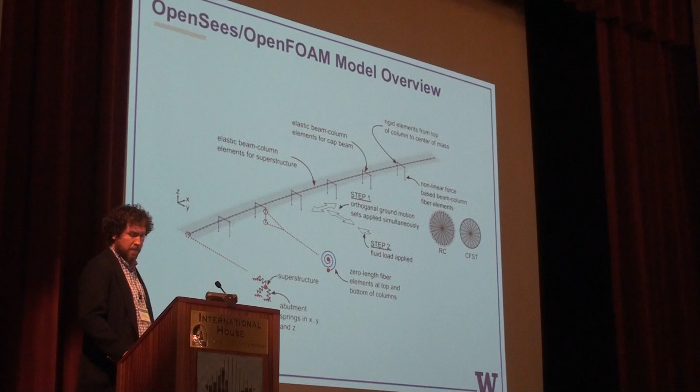So then we build a CFD model — this is our CAD drawing of that bridge. We've got every span, every detail. If we look at our mesh, we're modeling exactly what we would expect to see out there. We run a wave into it and get a dynamic loading profile, and we can attach that to the loading of the bridge after the earthquake.

Hopefully we can see this: the top left plot will be displacement of one of the columns versus time, the bottom left will be the shear force in the column versus displacement. Then we'll see how the bridge reacts to an earthquake and then the tsunami. The displacements are magnified by about 100 times, just to see the scope of what the tsunami does versus...

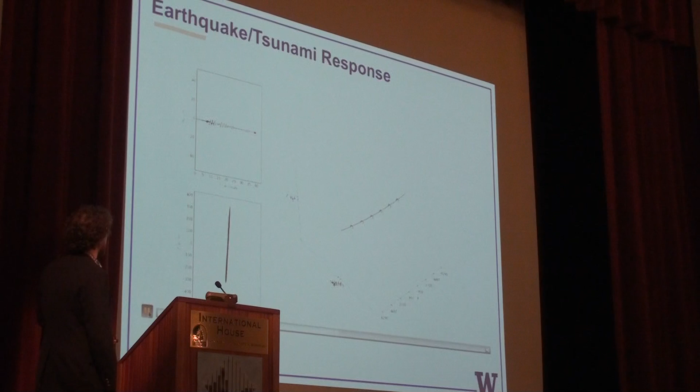So here is how it's displacing from the earthquake. We see this cyclic behavior going back and forth. The subsequent tsunami comes in and hits it. Extensive loading takes the whole thing out.

People ask how these loads compare with seismic loads. They are big — it's not something we can just expect that we will be meeting all of our demands inside of the design. We're still working on that. This result was provided to me at 4:30 yesterday afternoon, so we haven't had a ton of time to dive into it. But what it does say is it leads to the question.

We're talking about our 2D versus our 3D models — what's accurate, what's not, right? One of the big assumptions that we make when we're doing our fluid modeling is that our structure acts with small displacements, and we put it in as rigid boundaries.

As I look at that, that's anything but a small displacement. Extending this using the models comes down to understanding what each model is capable of physically, and exploiting that. Computationally, we can start doing some of these 3D models. The time frame for something like this is on the order of days to weeks, but a number of years ago, it was on the order of we just won't do it. So with that, I think that's all I have.

I have a 5 on there instead of a 0. So.

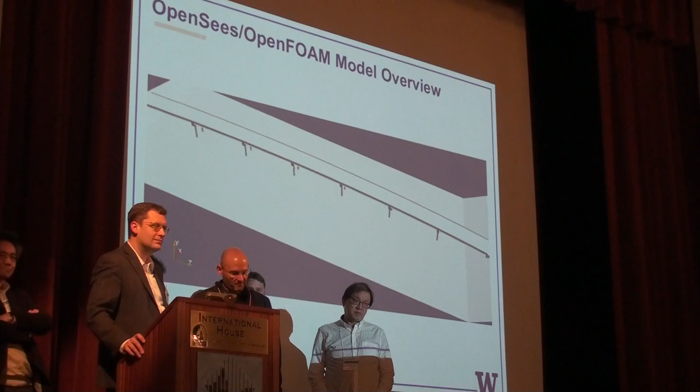Question? One of the lessons from the Kobe earthquake, the Japanese bridges that collapsed, was that they evidently put all their eggs in the strength design, but they had no fuses. It seems like a bridge deck philosophy might be to design in fuses so that the foundation and everything but the deck remained intact.

Then all you had to do is replace the deck. There's a lot of composite materials and stuff that might make that rapid. But what is the optimum material for a bridge? There's also the issue of being hit by a ship or a shipping container or all these other things, and wouldn't you want to know what the maximum loads could be and not what your probabilities are? But should there be fuses? This philosophy...

Well, you stuck in quite a question there. What's the optimum material for a bridge deck? Well, when do you want to build the bridge? We have this... That's like the $64,000 question. Right? So everyone try to answer that one.

But debris is something I know with the material point method, which we briefly mentioned from the workshop, that's something Pedro Arduino has been modeling a lot of debris impact with, and it is a big deal. I believe Ian Robertson, who's here, has done experiments with debris on structures in a tsunami load. Those things are being looked at. We didn't talk about them today, but it might be a subject tomorrow where we go more into detail on debris and damming effects, not just large shipping containers but also 2x4s and things that get caught in the flow and well up at one point on the bridge, adding mass and more loading on the structure. We'll probably touch on it some more tomorrow.